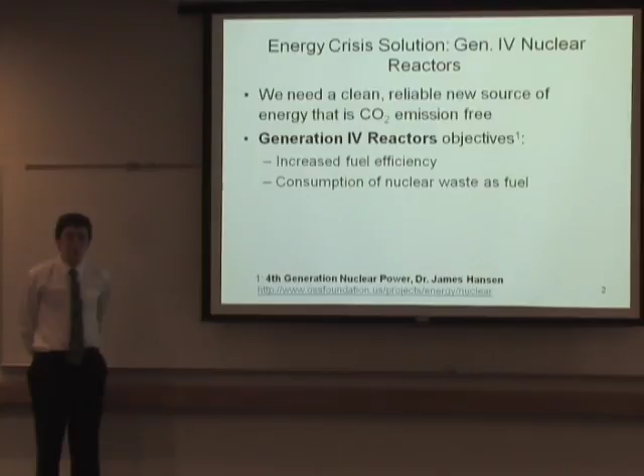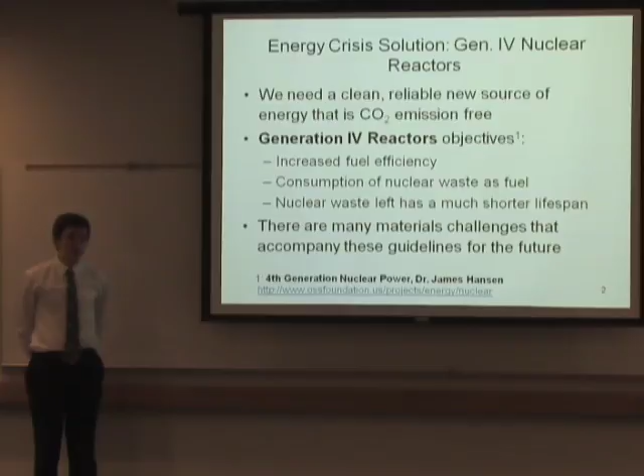These reactors claim to be 100 to 300 times more fuel efficient than current reactors employed today. They claim to be able to consume nuclear waste in the production of electricity, and the nuclear waste that is left over lasts only decades compared to the previous millennia. The only problem is that these reactors are about 20 years away from production, and there are many material challenges that accompany these guidelines for the future. So that's where I come in.

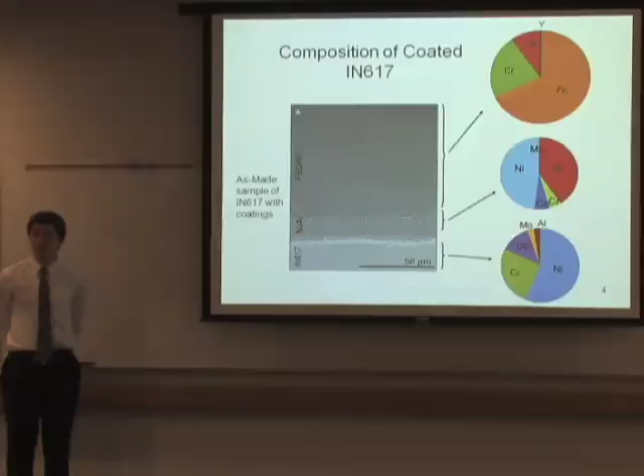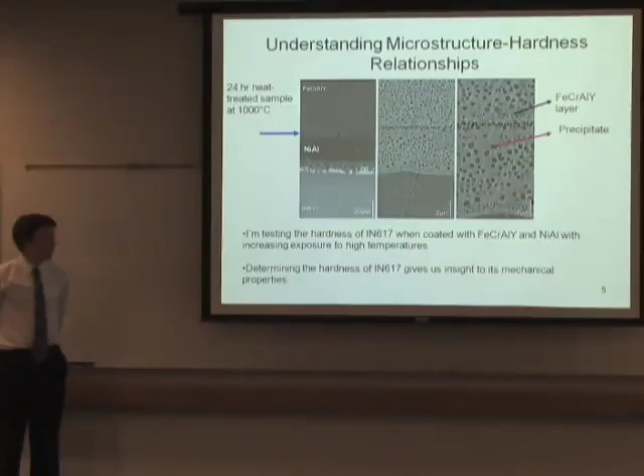And what we're concerned with is how this microstructure changes due to processes like interdiffusion. Interdiffusion is basically when elements from one substance diffuse into that of another, changing the microstructure and its properties. So here is a heat-treated sample of Inconel, and if we zoom in on the FeCrAlY layer right here, we can see these tiny small precipitates start to form due to interdiffusion. And we didn't really know how that would change the hardness or other mechanical properties. So what I have done is I've been measuring the hardness of Inconel when coated with these two alloys, because the hardness will give us insight into some of the mechanical properties of our sample.

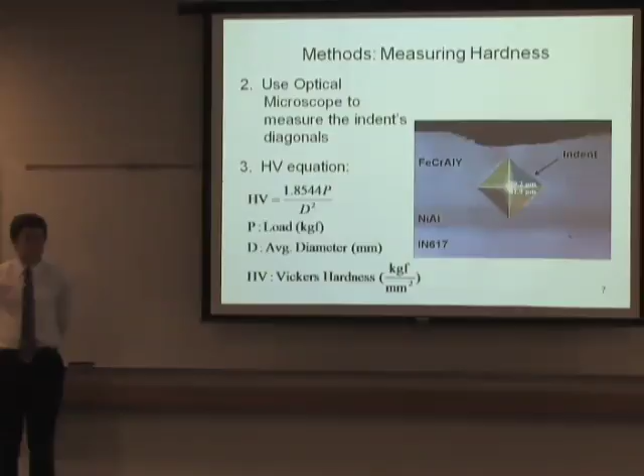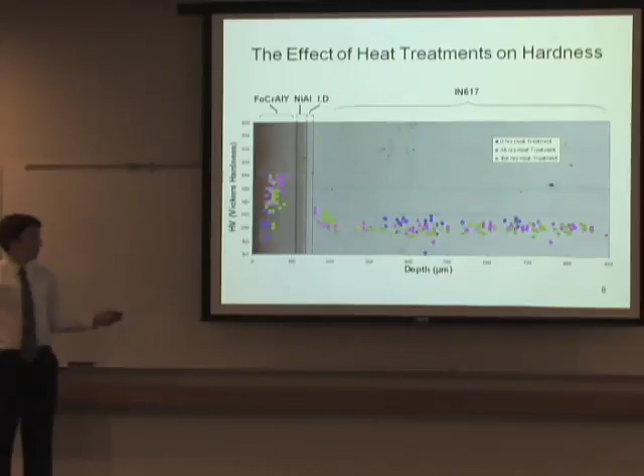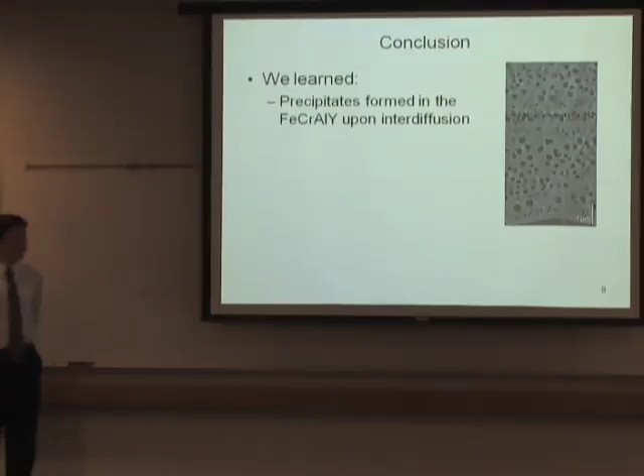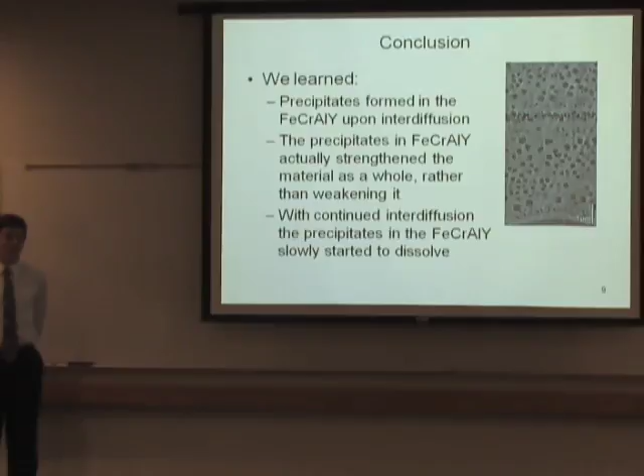So what we learned from these results were that these small precipitates were forming in the FeCrAlY layer upon interdiffusion, and that these precipitates were actually strengthening the material as a whole rather than weakening it. But upon continued interdiffusion for longer periods of heat treatment and time, these precipitates slowly started to dissolve, weakening the material once again, and that is a major concern for us if this material with its coating is ever to be used in an application such as the heat exchanger.

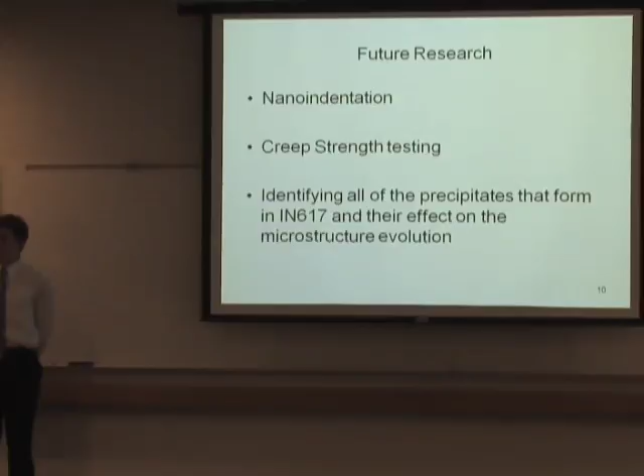Now, I learned a lot from this program, but the most important thing I came away with was that if I make my goals, I can set out to achieve them. I came into this program knowing next to nothing about material science and what it entailed. And through hard work, determination, and persistence, I learned the terminology, I learned all about my project, and I learned what material science has to hold. And I know now that if I really set my goals, I can achieve what I set out to get.